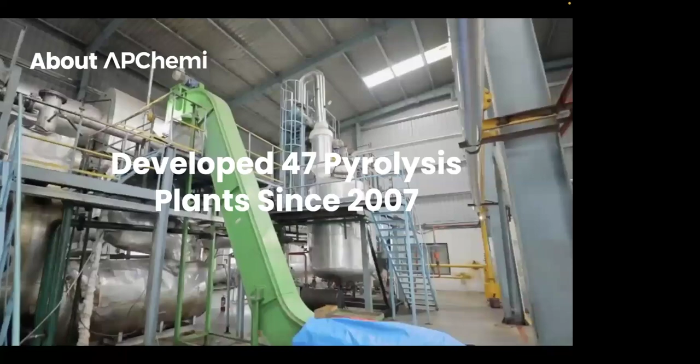We are leaders in pyrolysis in terms of the number of plants set up. We turn non-recyclable plastic, tire, as well as biomass into value. The video you see in the background shows visuals from the actual projects we have set up at industry scale. We've developed 47 pyrolysis plants since 2007. We have set up 3 pyrolysis oil purification plants, and we own our own 15,000 to 30,000 liter per day fractional distillation plant for tire pyrolysis oil near Mumbai.

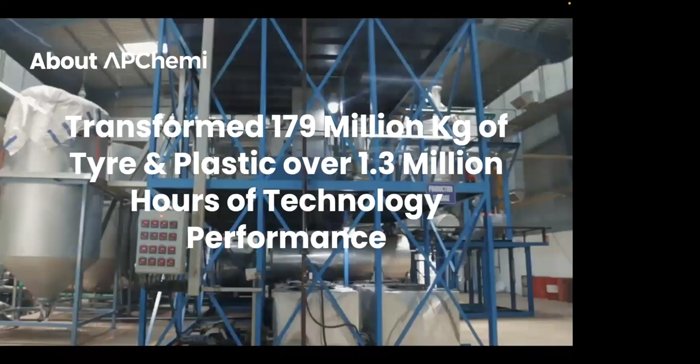We've transformed 179 million kilograms of tire and plastic over 1.3 million hours of technology performance. We're supported by Shell Petrochemicals. We're working on up to 240 tons per day pyrolysis projects in Europe and the UK. We've created over 3,000 jobs since 2007. Recently, we've created more than 7 proofs of concept on chemical recycling technologies, including 3. Right now, this number has gone to 4.

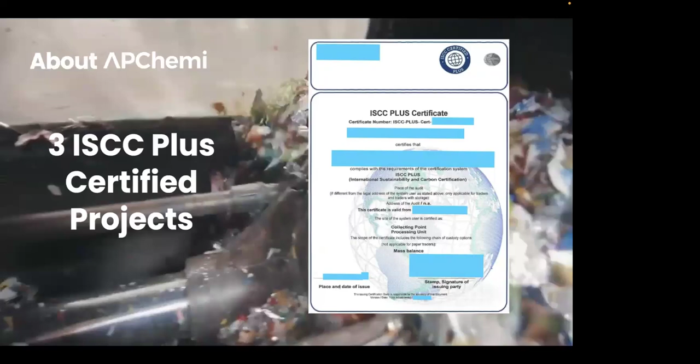3 of the plants to which we gave the pyrolysis and oil purification technologies are ISCC Plus certified, supplying the oil produced from these projects to refineries for production of circular plastics, sustainable chemicals, and circular polymers. We have 12 patents in pyrolysis and pyrolysis oil purification.

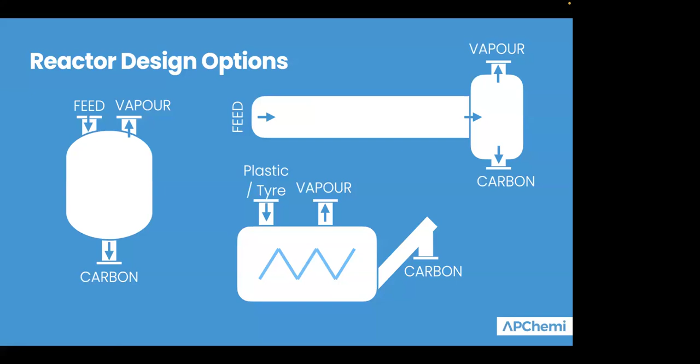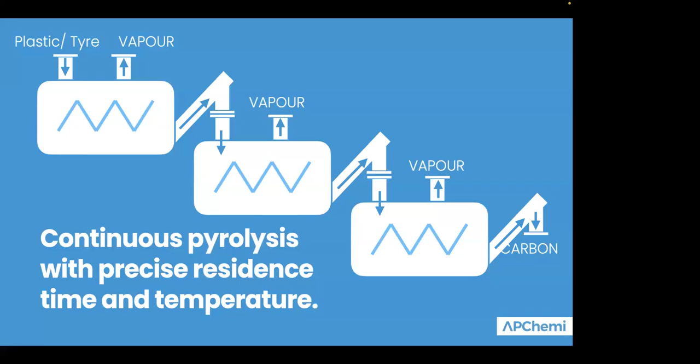This is our typical plastic or tire pyrolysis reactor. In the same process, you can switch over the feedstock. It has an agitator inside and carbon discharge from the other side, so you don't have to open the reactor to feed a new batch. We've also connected multiple reactors together to convert the batch process into a pseudo-continuous process, wherein even though individual reactors work in batch mode, the overall process works in a continuous manner.

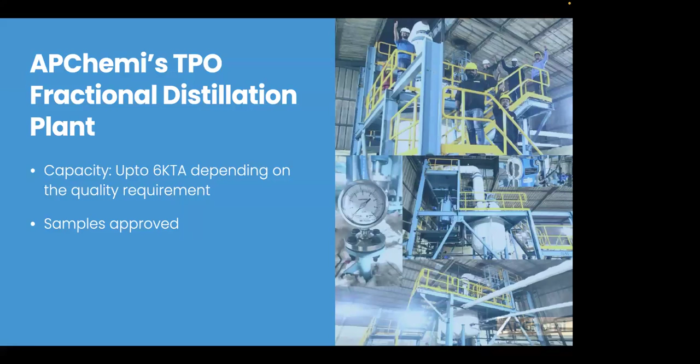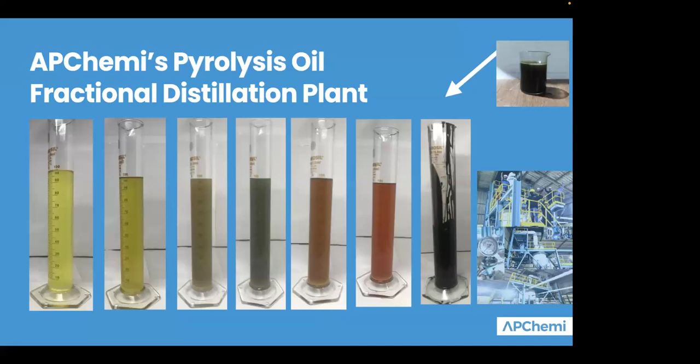We have our own pyrolysis oil distillation plant near Mumbai, where we are able to distill around 15,000 to 30,000 liters of tire pyrolysis oil into light, middle, and heavy fractions. Our samples have been approved for production of oil-derived carbon. We can adjust the flash point as well. In fractional distillation of tire pyrolysis oil, you get these colors, and depending on what fraction you separate and at what temperature, you find different colors, from light to very heavy.

Now, coming to the second part of the presentation. As far as industry reality is concerned, right now we are moving from high risk to engineered product, with a lot of initiatives the industry wants to take on rCB. More than 80% of projects have failed on quality consistency. 60% of producers lack feedstock control. It's not very clear whether I'll be able to source only truck tires, or whether some car tires or off-road tires will be mixed with the feedstock.

And what we are looking at is, rather than going for, say, 0.5% ash content, how can we reduce the ash content to 8 to 12%, and have a fit for purpose kind of an rCB grade, rather than coming up with a very low ash content rCB grade as such. So for years, the industry had chased unattainable less than 1% ash purity, leading to very high cost and project failures. The reality is that rCB is a new material and there is no direct replacement as such.

Thank you so much. And the market gap is that success is not about owning a pyrolysis reactor, but it is about creating a fit for purpose engineered product with a validated pathway from feedstock to the final specification as such.

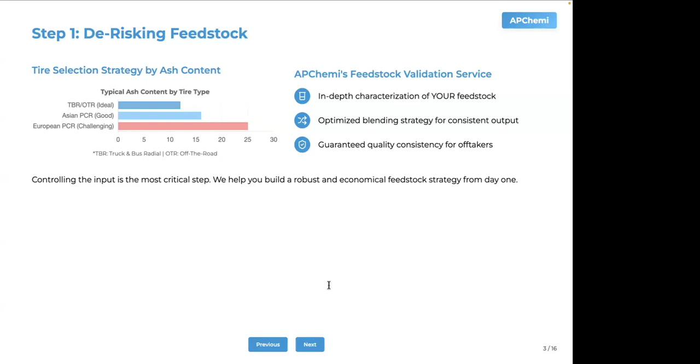Now, in case of de-risking of the feedstock, of course, what is ideal for tire selection strategy by ash content is that we would like to have, say, around 12% of ash content. However, we see that Asian PCR is around, say, 16% of ash content. European PCR can go even up to 25%. So what we can do is we can offer a feedstock validation service, in-depth characterization of the feedstock, and optimize the blending strategy to arrive at the most commercially viable option.

Smart purification is important for achieving optimal return on investment. Very high ash rCB can be processed to reduce the ash content as well as recover the zinc as the byproduct. And zinc removal kind of creates the necessary revenue stream that enables certain reduction in the ash content in a commercially viable or friendly manner, wherein whatever cost that you put in for environmental compliance can be also compensated by the amount of zinc that you recover.

And then you have kind of an optimized rCB, not targeting 0.5% or 1% ash, but rather targeting anywhere between, say, the slide said 8 to 12%, but I would say anywhere between 8% to 15% based on what are the requirements of the off-taker. So why chase 99.9% purity? I fully agree with you. In case we can have lower purity, but it just works for the customer as such. And this kind of slashes the processing cost by 40 to 60% while still recovering certain quantity of valuable zinc to make the entire process viable.

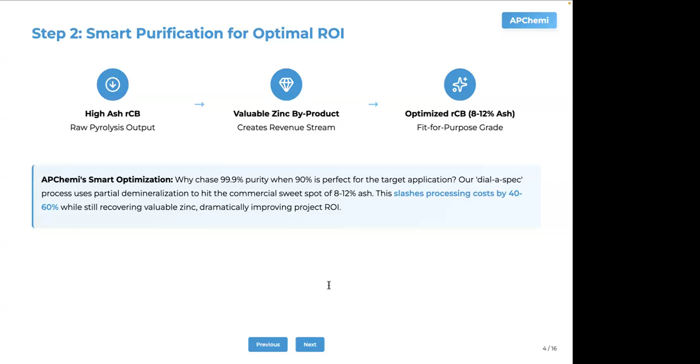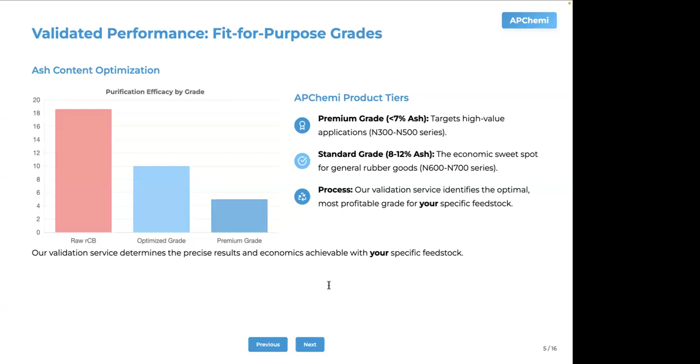For fit for purpose grade, what we've done is we have done some validation. We've seen that raw rCB can have ash content around 18-19%. You can have an optimized grade which can be around 10 to 12%, and then there can be a premium grade which is like around 4 to 8% as such. So our product tiers, we are looking at, say, less than 7% as premium grade. Standard can be around 8 to 12%, which can have much wider application in the market as such.

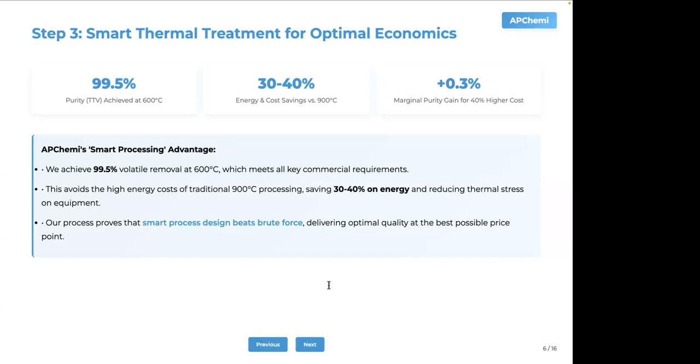The thermal treatment process also, what you can look at is, if you try to do a thermal treatment at 900 degrees Celsius, then you're just getting 0.3% extra advantage compared to doing a thermal treatment at 600 degrees Celsius for a little longer period of time. So comparing how extensive is the thermal treatment and what is the value that can come out of that thermal treatment, some pilots can be done on that as well.

So as far as our commercially validated track record is considered, our ISCC plus certified facilities are there to people who we've given technologies. We have our own tire pyrolysis oil distillation plant, and we are able to upgrade the feedstock value as such.

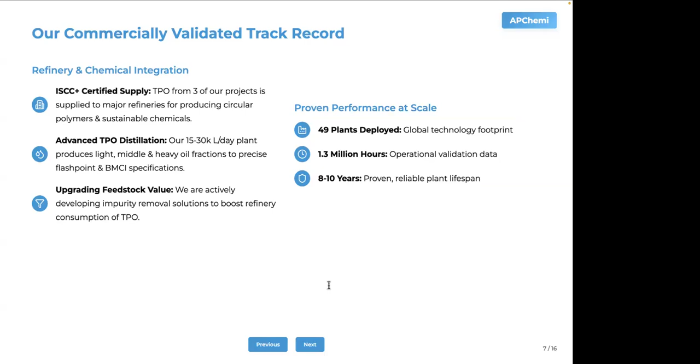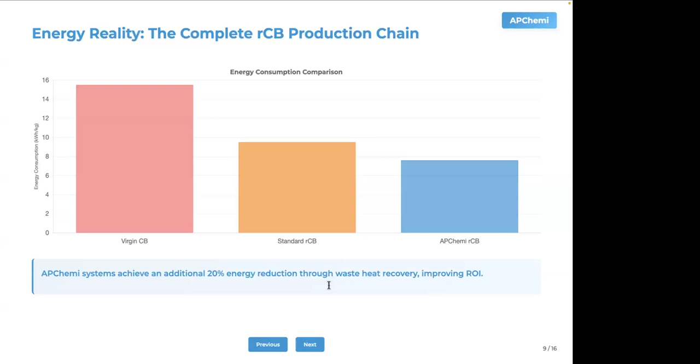Virgin versus rCB: this has to do with life cycle analysis, how much energy consumption there is. In the case of virgin carbon, the energy consumption is somewhere around 15 kilowatt-hour per kg of virgin carbon black produced. Compared to that, rCB is somewhere around 9 kilowatt-hour per kg, and we are able to reduce it further by around 20% because of additional waste heat recovery expertise that we have developed.

Now, as far as the carbon footprint of rCB is concerned, the common market claim is that there is an 80 to 90% reduction of carbon footprint compared to virgin carbon. However, the reality is that it is somewhere around 45 to 55% reduction. The difference is because unrealistic claims often ignore the crucial energy inputs from post-processing like milling and purification to achieve ultra low ash.

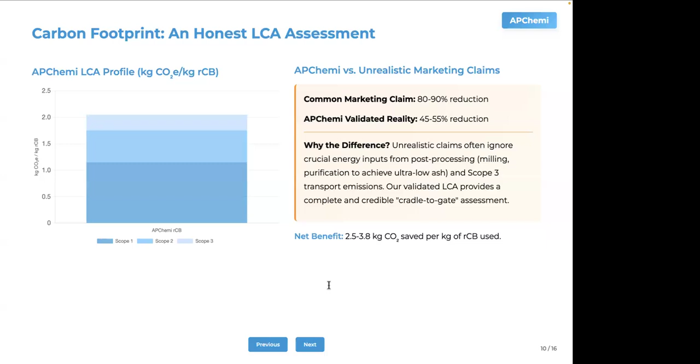Also, scope 3 transport emissions are excluded. Some of the life cycle analyses we've seen consider renewable energy for electricity. So practically, we can say that there is around 45 to 55% reduction in carbon footprint rather than 80 to 90% when compared to virgin.

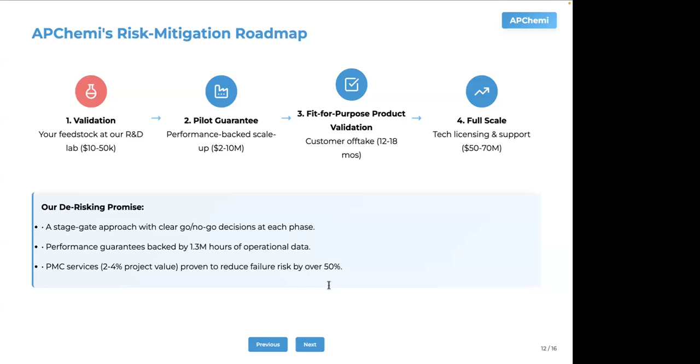This slide has been covered in the discussion, so I'll skip it. I would like to close the presentation quickly now. So the approach would be to first do some validation, do pilots, and prepare fit-for-purpose samples in collaboration with us. And once the samples are approved, of course, we are happy to scale up the technology from pilot scale to commercial scale, as we have done multiple times in the past.

As far as advanced TPO upgrading is concerned, from tire pyrolysis oil, the light and middle fractions go to refineries for production of circular plastics or circular polymers and chemicals. And the heavy fraction, which has higher BMCI, goes to production of oil-derived carbon. These are the three grades.

We can say BMCI of 77 has a flashpoint of around 130. 80 would have around 172, and in case BMCI is around 84, in our process we've seen a flashpoint of 182 as well. So various grades of BMCI or flashpoint we can manufacture.

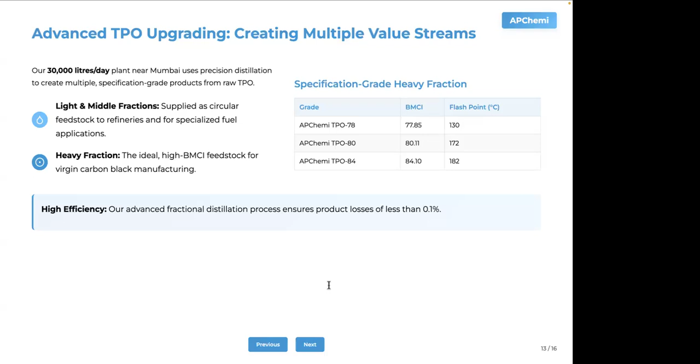Going into the long run, maybe over a period of 3 to 5 years or 10 years, what we would recommend is that leaders produce a variety of qualities of end products. There can be premium rCB as one of the byproducts, with less than 7% ash. There can be standard rCB. There can be rCB as such without any purification.

There can also be recovery: for example, if there is 10,000 tons per year of tire input, around $150,000 to $250,000 worth of zinc can be recovered. Pyrolysis oil is another recovered stream. So if you have multiple end products that you can produce, that can be very interesting. So we are happy to collaborate starting from a pilot scale and then scale it up together.

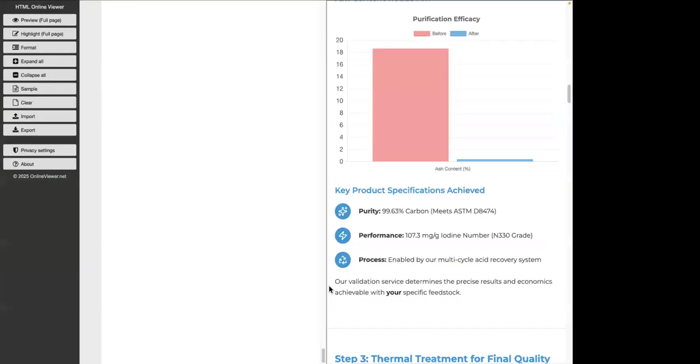I'm here throughout the day. We bring world-class engineering to the table, and we can figure out the journey for the entire industry together. Thank you.

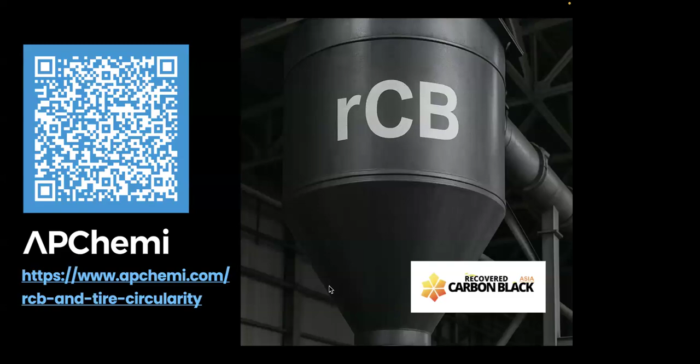Any questions for Suhas? Thank you, Mr. Dixit. The classification you made, premium rCB, standard rCB and optimized rCB, where did this kind of nomenclature come from? It is less than 7%, 8 to 12%. What is the basis of that?

Now, these are not any international standards or something. No, this is where we see the market probably would go. This is our analysis of the situation. This is not any specific standard as such. This is our view of the situation. Yeah, that's why you get customers' feedback and accordingly you have categorized three categories. Thank you.